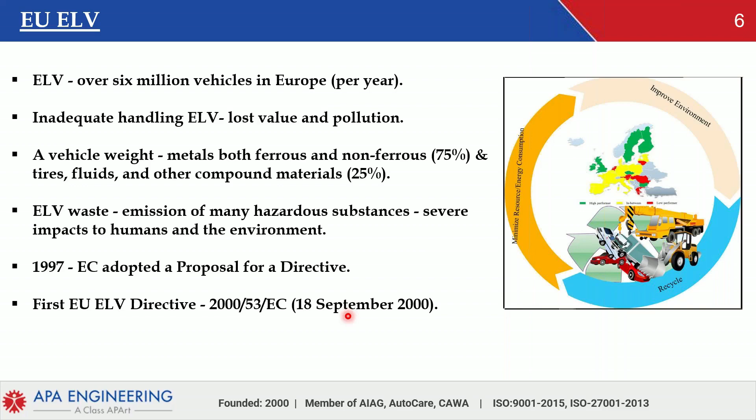Moving on to the next slide, we shall see the objective of the current ELV. The main objective of the current ELV is to prevent and reduce the waste quantity and the harmfulness of hazardous substances in the environment.

As we are aware, the ELV has a triple R concept, which means vehicles need to be designed to enhance proper dismantling and allow components and materials for reuse, recycle, and recovery. To do this triple R better, there is a need to increase the number of ELVs treated in ATFs, that is Authorized Treatment Facilities, and IDIS, that is Improved Information for Dismantling and Parts. This will improve the environmental performance of all economic operators involved in ELV treatment. The economic operators here may be producers, distributors, collectors, motor vehicle insurance companies, or dismantlers, shredders, recoverers, or recyclers, etc.

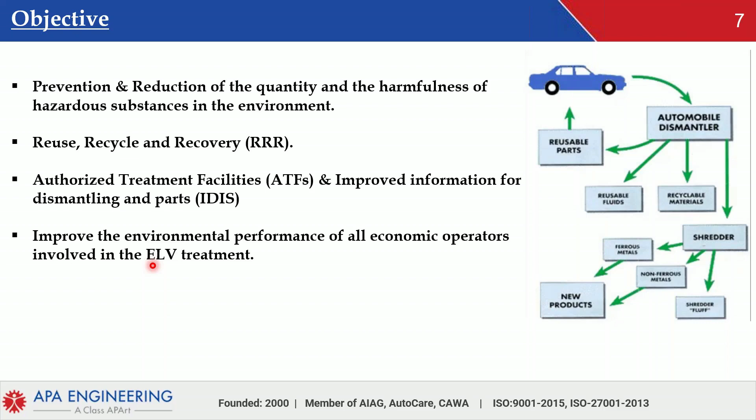Let's move on to the next slide. Here we will see the scope of current ELV. The current ELV covers two types of category vehicles, M1 and N1 category vehicles. The M1 category vehicles are cars with less than 8 passenger seats excluding the driver seat, whereas N1 vehicles are like trucks having less than 3.5 tonnes of GVW, that is gross vehicle weight.

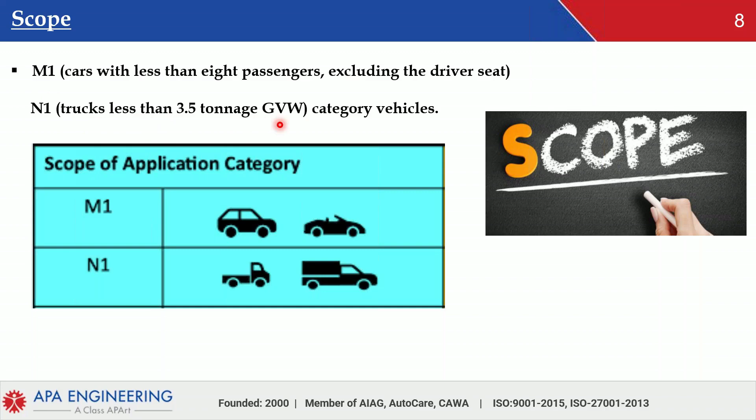Moving on to the next slide, here we will see about the requirements of current ELV. The ELV directive has two requirements basically: improving the recyclability of the vehicle parts and minimizing the use of hazardous substances. Those substances are lead, mercury, cadmium, and hexavalent chromium.

The ELV directive requires OEMs and other stakeholders to establish several collection centers to collect the old cars and dismantle or recycle as per the directive listed standards and targets.

And those requirements were meant to be in 2006, the percentage is about 80% for reuse and recycle, and for reuse and recovery it's about 85%. It gets improved in 2015, where the target is about 85% of reuse and recycling, and 95% of reuse and recovery.

In order to meet this regulation, the OEMs require all the suppliers to provide detailed material breakdown analysis reports on the parts and assemblies they supply. We have maximum allowable limits for some of the chemical substances like lead, mercury, cadmium, etc.

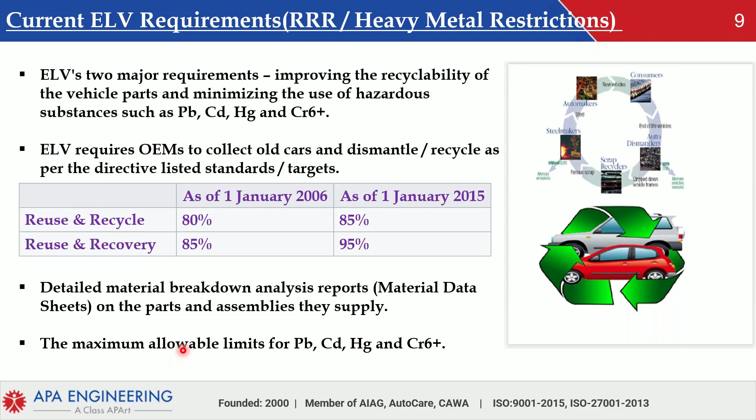Moving on to the next slide, we'll see what this Annex 2 deals with. As told in the previous slide, the ELV directive restricts some of the chemical hazardous substances in vehicles, but with some exemptions for the vehicles placed in the European market after July 2003.

Those exemptions are like, the allowable percentages are 0.1% for lead, hexavalent chromium, mercury, and about 0.01% for cadmium. That is, some applications are permitted to use lead, mercury, and others above the allowable threshold limits, which were explained in detail in Annex 2 of this ELV directive.

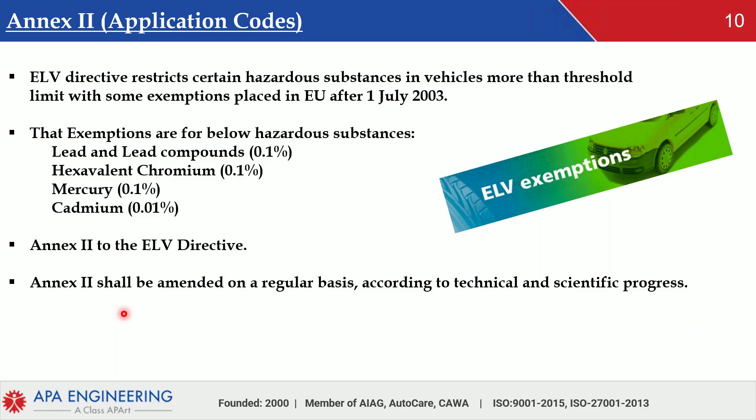This Annex 2 shall be amended on a regular basis according to technical and scientific progress. For example, now the exemption 8G, which is related to lead in solders, is replaced by 8G1 and 8G2, where a new exemption like 8K is inserted, which is related to the soldering of heating applications with 0.5 amps or more of heat current. Moving on to the next slide, we'll see about vehicle type approval here.

The term vehicle type approval describes the process applied by the national authorities to certify that a model of vehicle meets all the EU safety, economical, environmental, and conformity of production requirements before it gets authorized to be sold or registered or even entering for service in the EU market.

This European Union legislation provides the type approval for whole vehicles or vehicle systems or as components and as separate technical units. That may be component-wise or system-wise. Some examples are shown here.

Like the vehicle prototypes are tested for compliance with EU safety rules, for checking the installation of lights, for checking the braking performance, the stability control, and performing crash tests with dummies to check for noise and emission limits, as well as the production requirements of individual parts and components like checking for seats, steering wheels, airbags.

There are many vehicle certification agencies or companies. Here we will see about ECWVTA, which means European Community Whole Vehicle Type Approval.

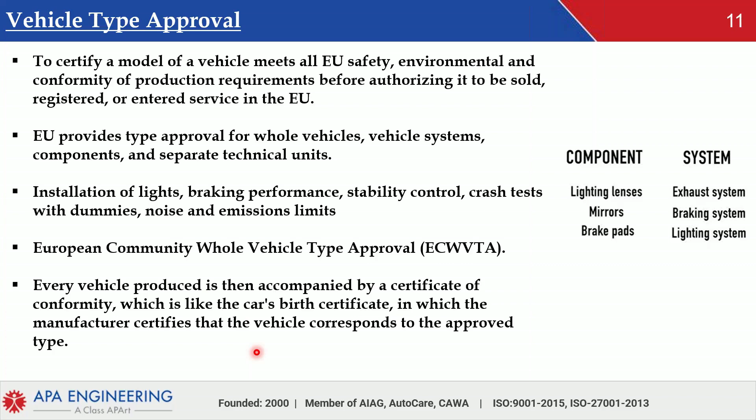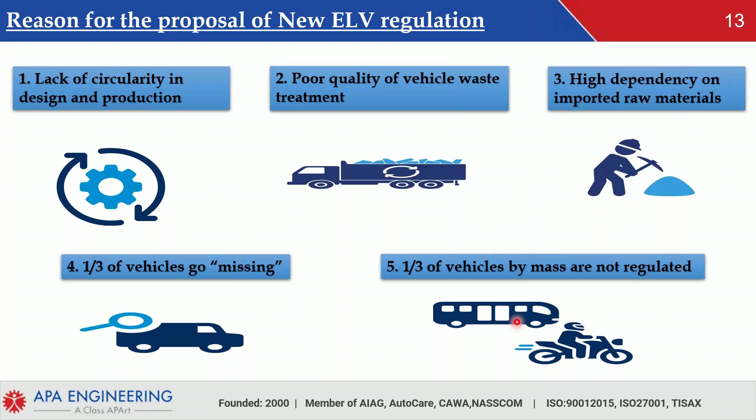And this new regulation will replace the current directives such as the ELV directive and RRR type approval directive. The overall objective of this initiative is to improve the functioning of the European internal market by reducing the negative environmental impacts linked to the design, production, service life, and end of life treatment of a vehicle.

Its first objective is improving circularity at the design phase of a vehicle, which facilitates and increases the removal process as well as the recycling of material, parts, and components.

The next is increasing the use of recycled material in new vehicles, such as plastic, steel, aluminum, and critical raw material. It reduces the industry's dependency on raw material and helps the industry produce decarbonized vehicles. At least a minimum 25% of recycled plastic should be used in new vehicles.

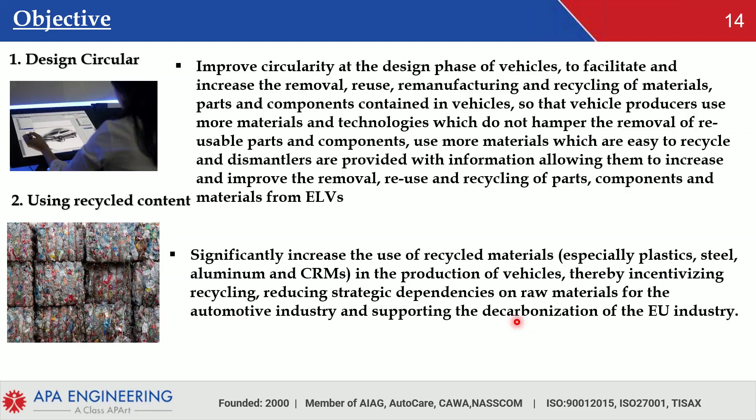The third objective is collecting more vehicles. It prevents exporting of non-roadworthy vehicles from the European Union. Thereby, the number of missing vehicles can be reduced and treated legally. Vehicles can be exported to third countries if they are roadworthy and the technical status of the vehicle is not ELV. Next is treating waste in a better way.

It increases the quantity and improves the quality of raw material, reducing the environmental footprint linked to waste management. Ultimately, it opens the market for secondary raw material and facilitates the incorporation of more reusable parts into used vehicles, extending their lifespan at moderate cost for end users.

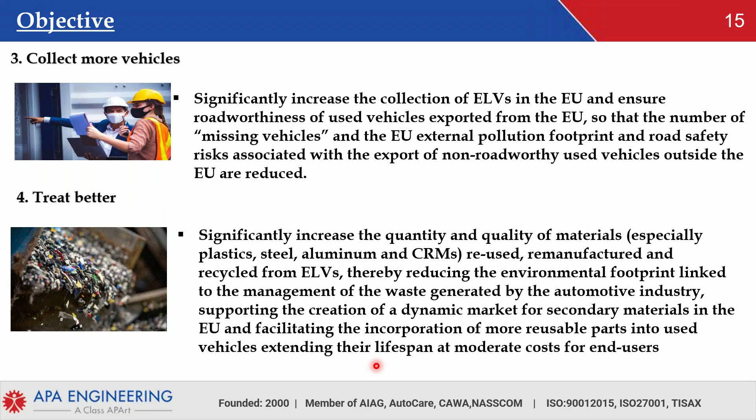Make producer responsible. As I said previously, the lack of cooperation between waste operators and manufacturers leads to poor waste treatment. So to improve the treatment process, the manufacturer must take financial responsibility for the vehicle when it becomes waste, and the manufacturer must provide incentive to waste operators.

Finally, covering more vehicles such as lorries, buses, trailers, and L category vehicles, and gradually increasing their circularity in the design, production, and end of life treatment of vehicles. It reduces the loss of resources and the collected vehicles can be treated properly.

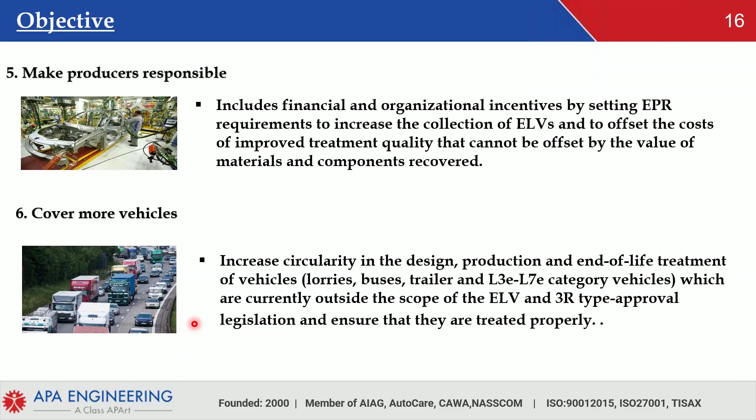Next, we could take a quick glance at the scope of this proposed regulation. As I said previously, the existing law covers passenger vehicles M1 and light commercial vehicles N1. The remaining vehicles like two-wheeled, three-wheeled vehicles, lorries, buses, and their trailers are not covered under the existing law.

Considering their eco-design and the management at their end stages, this regulation covers not only vehicle categories M1 and N1, but also other L category vehicles, heavy-duty vehicles, and their trailers.

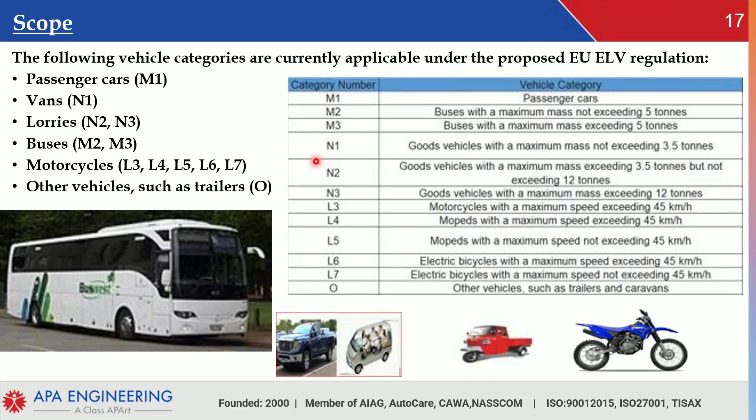This regulation has a few exemptions. Those are special purpose vehicles such as military vehicles, vehicles produced in small series, vehicles of historical interest, and vehicle categories undergoing multi-stage type approval.

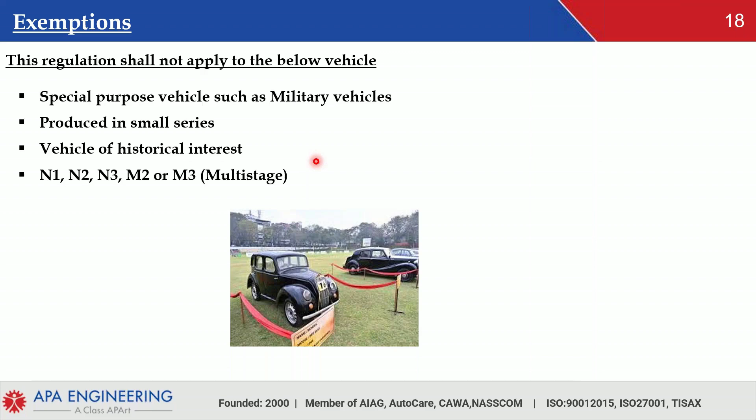The upcoming slide covers the type approval requirement of this regulation. As per this new ELV rules, the new vehicle must meet the circularity requirement of this regulation to get the type approval from member state authority. Let's see what those are.

To improve the removal, reuse, and recycling of components and materials, new vehicle design should help the economic operator to dismantle the components easily without any hindrance, especially reusable components such as batteries, e-drive motors, engines, electrical and electronic components, wire harness, etc. Next, the new vehicle should be constructed in a way to achieve minimum RRR targets set out by this regulation.

The current target for reuse and recycling is 85%, as well as reuse and recovery is 95%. To achieve this target, vehicle manufacturers and their suppliers should develop their own design principles to improve the reusability and recyclability rate at the development stage of new vehicles.

And manufacturers should design the vehicle in a way that their components can be recycled and reused. Coming to RRR calculation, the rates of reusability, recyclability, and recoverability should continue to be calculated based on the ISO standard, as in the RRR type approval directive, until the Commission establishes a new RRR calculation method.

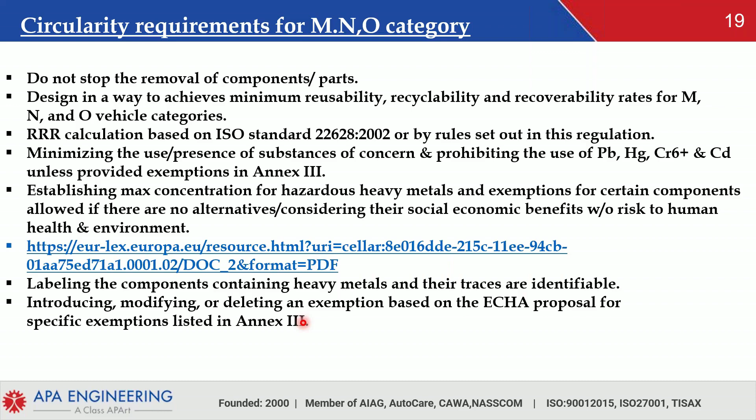The final requirement is about minimum recycled content in the vehicle. As I said previously, the low rate of plastics were recycled from ELVs. So to put a full stop to this issue and to increase their uptake in new vehicles, the Commission sets a minimum target for recycled plastic, which is 25% by weight. It should be included in the new vehicle, and accordingly the vehicle should be designed.

For other materials like recycled steel, the Commission will set a target within 3 years after the regulation enters into force, based on a feasibility study including economic assessment. For other materials such as aluminium and critical raw materials, the target will be evaluated in future based on changes in automotive design and the availability of recycling capacity.

Along with this requirement, this regulation places obligations on manufacturers. Let's see those obligations one by one. The vehicle manufacturer must share technical documentation showing the percentage of recycled material present in the new vehicle. This mandatory declaration must be shared with the type approval authority.

The next obligation is that the vehicle manufacturer should provide accurate, complete and up-to-date information on the safe removal and replacement of vehicle parts and components with the waste operator via a digital tool, the circularity vehicle passport, in order to improve the ELV treatment process. The next obligation is that the manufacturer and their suppliers should use component and material coding standards.

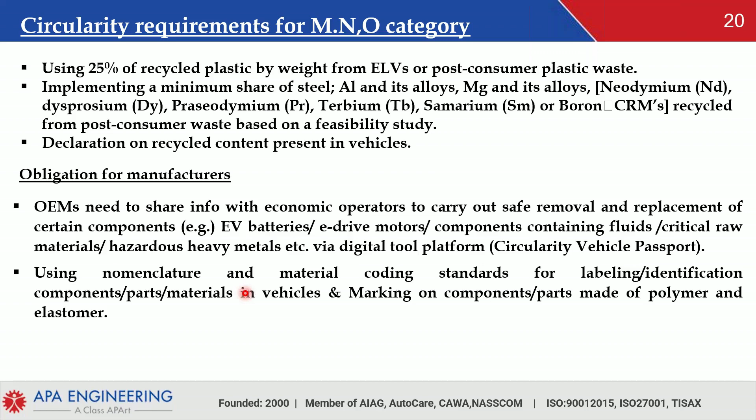And also, the manufacturer should share information regarding e-drive motors. The manufacturer has to verify that new vehicles do not contain any non-reusable components, for example airbags.

And finally, to get type approval, the manufacturer has to share information with the type approval authority that their vehicle meets the circularity requirements of this regulation, and also the type approval requirements of the regulation on approval and market surveillance of motor vehicles and their trailers and of systems, components and separate technical units.

Then the manufacturer has to share the circular strategy. It has to be updated every year, or in case of any major change in vehicle design and production.

Next, we'll see the time plan of this regulation. Currently, the Commission has opened a feedback period for stakeholder consultation, which comes to an end this November, and it will publish the feedback on the official website.

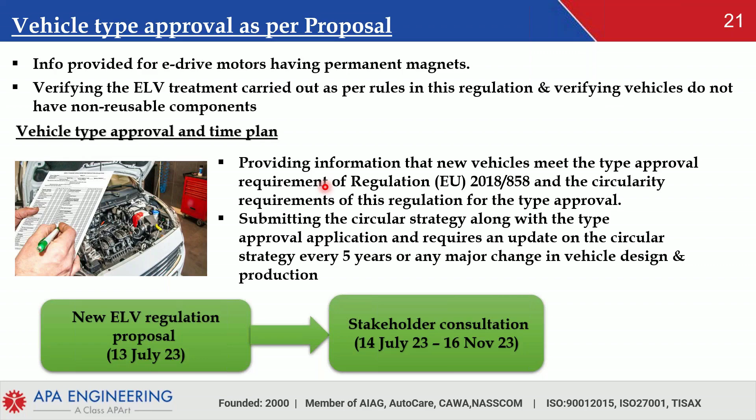Next, we'll see the conclusion. The EU ELV regulation is a significant step towards achieving a sustainable future in the automotive industry. This regulation is expected to have significant environmental benefits, including a reduction of 12.3 million tons of carbon dioxide emissions annually by 2035. The regulation will replace the current directives on ELV and the type approval of motor vehicles with regard to their reusability, recyclability, and recoverability.

The EU's transition to a circular economy will reduce pressure on natural resources and will create sustainable growth and jobs. It is also a prerequisite to achieve the European Union's 2050 climate neutrality target and to halt biodiversity loss. Finally, the new requirements on minimum RRR targets, minimum recycled content, and the requirement of substances apply to vehicle categories M, N, and O, especially M1 and N1 vehicle categories.